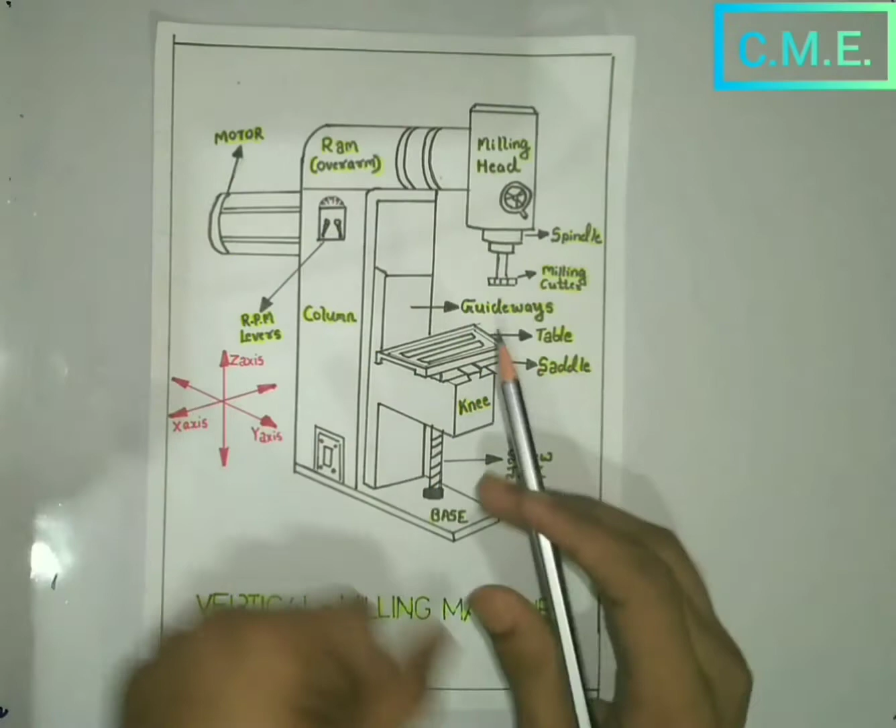In this video, I am going to describe a vertical milling machine along with its parts, and also compare it with a horizontal milling one. In my previous lecture, I already described a horizontal milling machine and its parts, so you can refer there.

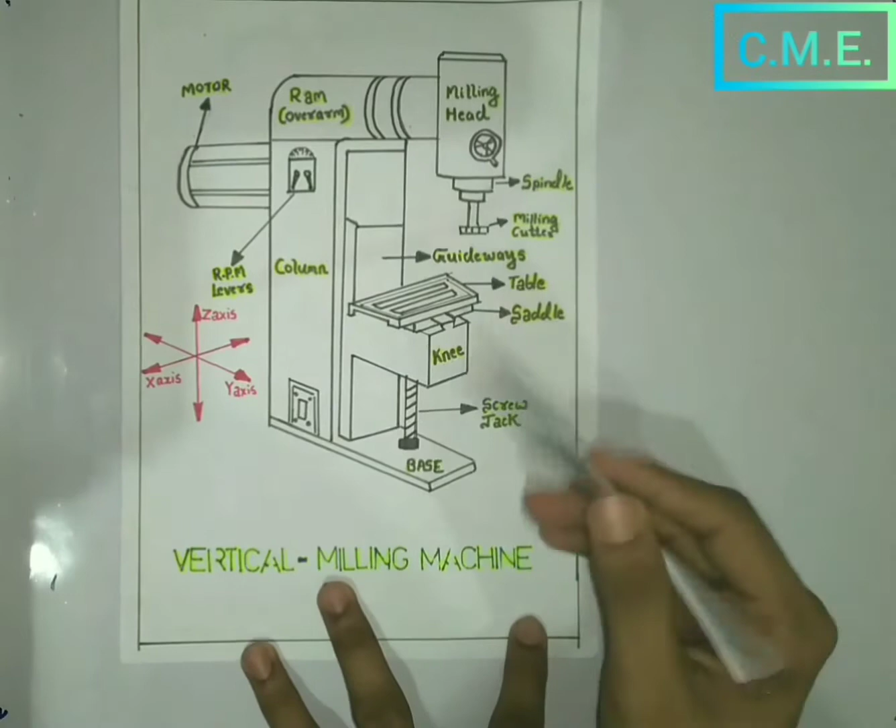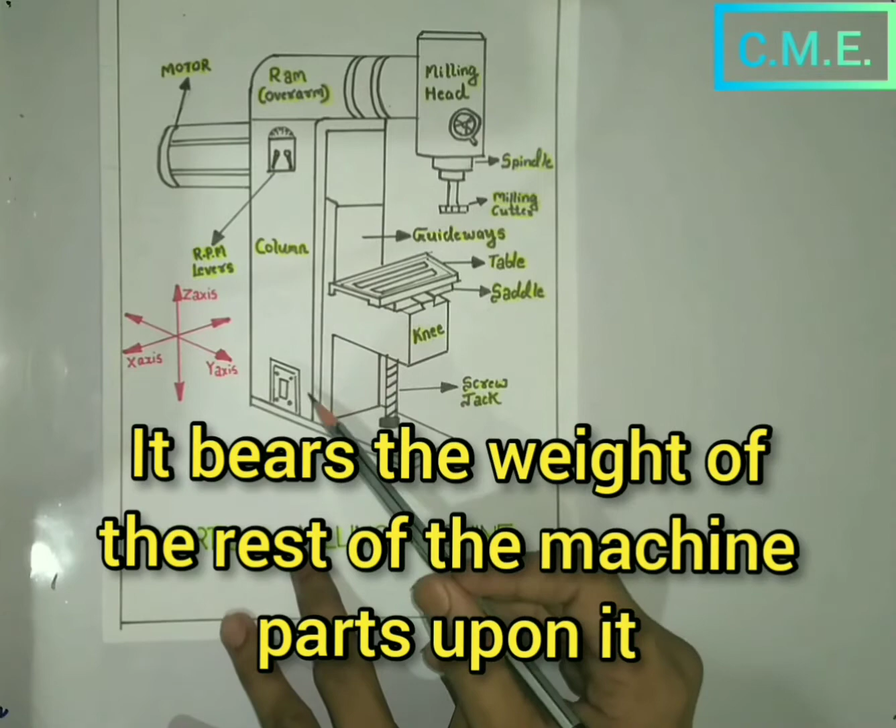So let's begin. This is a diagram of a vertical milling machine, and let's start with the base. This portion is called the base, and it bears the weight of the rest of the machine parts like the knee, the column, the ram, and the milling head. All of their weight is upon this base. This base is firmly mounted to the shop floor, and it contains the coolant reservoir.

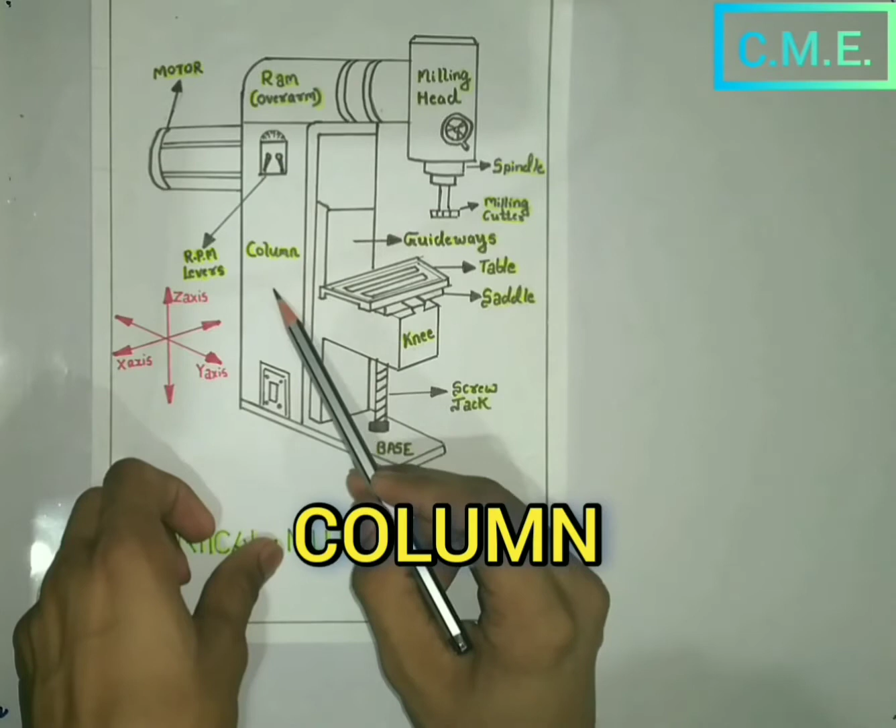After this base comes the column. This column contains the clutches, the shafts, the gear mechanisms, the pulley mechanisms, the electrical components, and everything needed for the rotation of the spindle and ultimately the milling cutter.

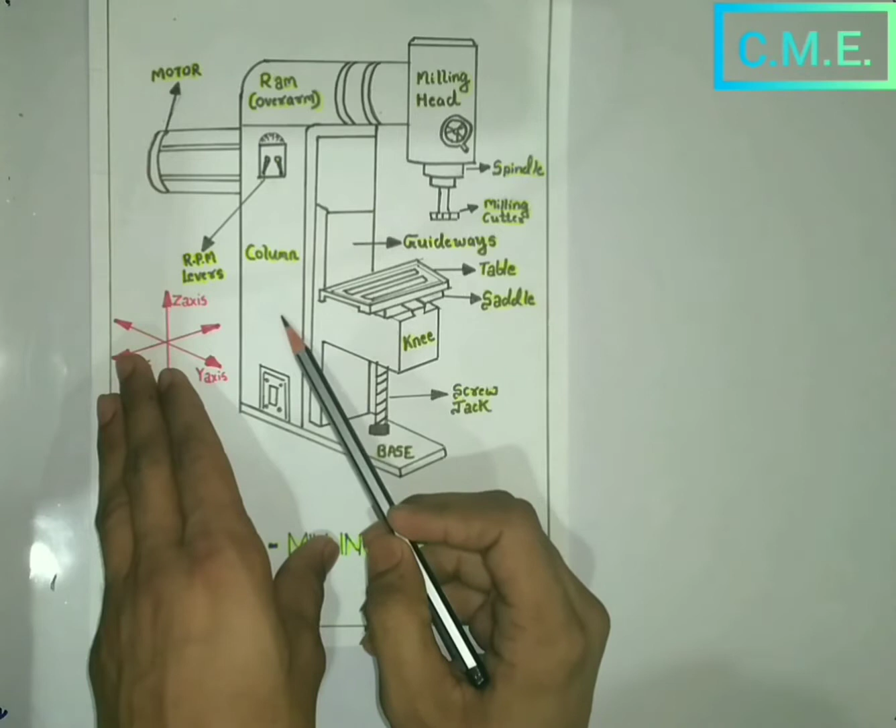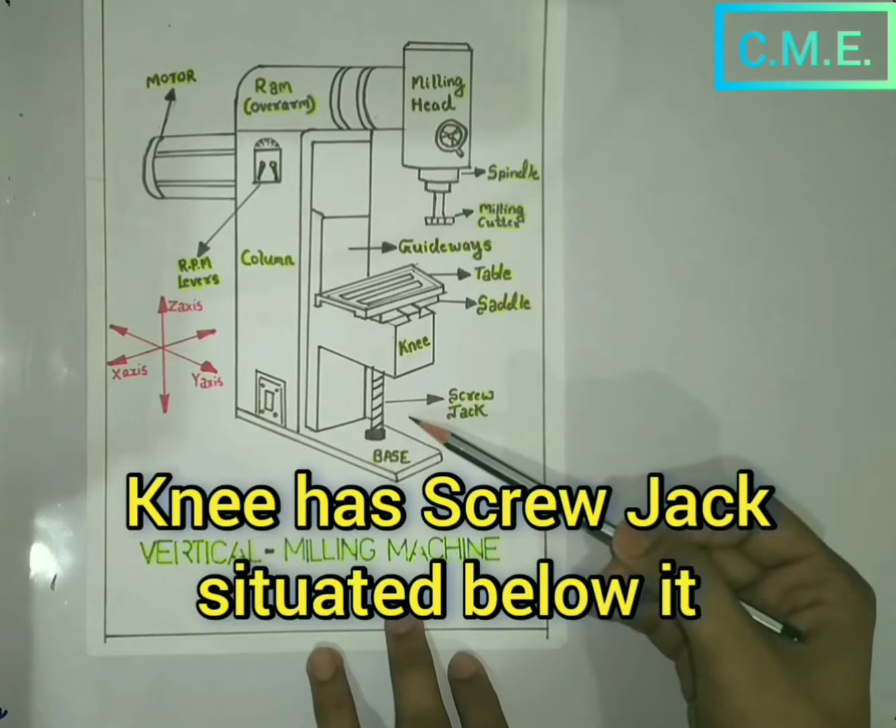In front of this column is the knee. This knee is mounted upon the vertical guideways of the column, and below this knee is present the screw jack. Because of these two factors, the vertical guideways and the screw jack, this knee is able to have its vertical motion, up and down along the z-axis.

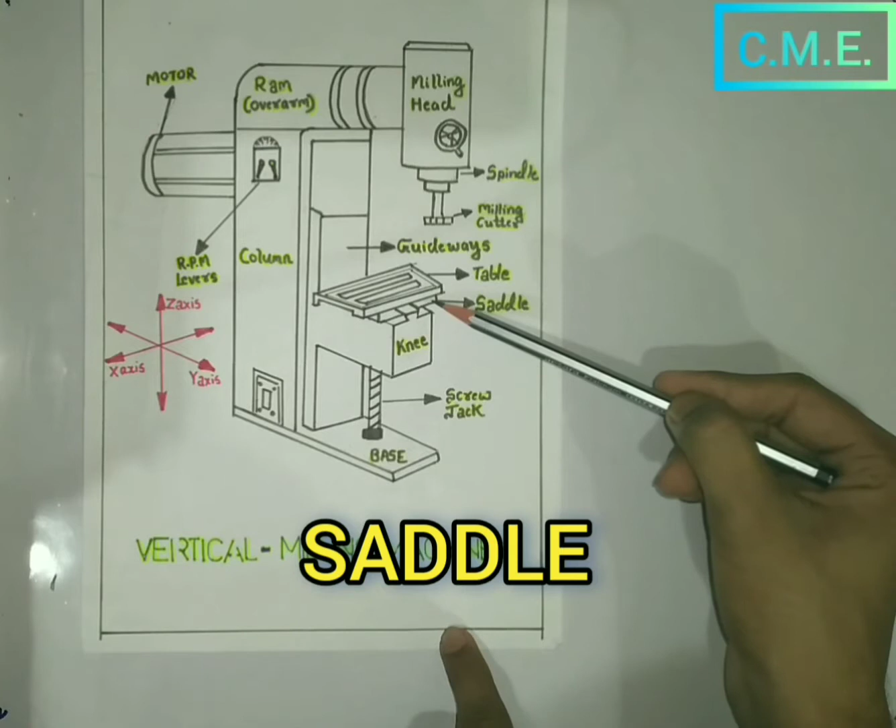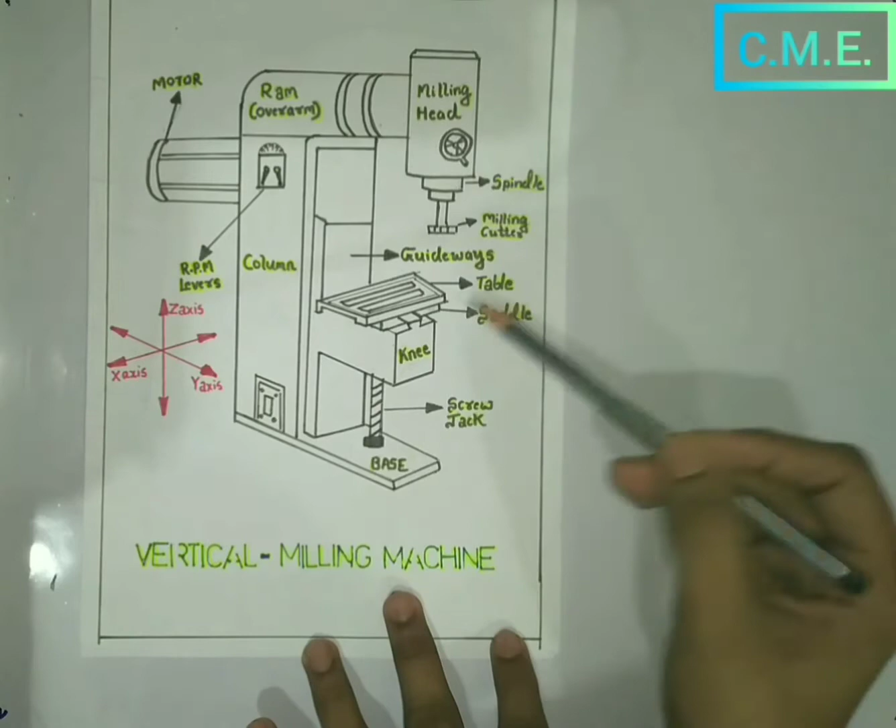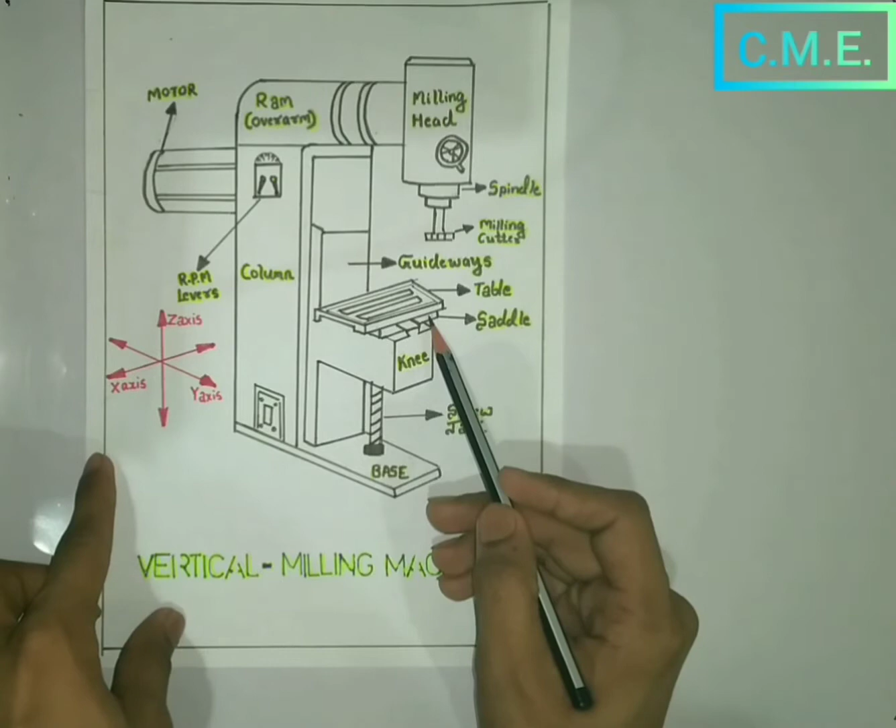Upon this knee is present the saddle. This saddle is mounted upon the horizontal guideways of the knee. At the interface of the saddle and the knee is present another set of guideways - horizontal guideways, similar to how we had vertical guideways between the column and the knee. Because of these guideways and the presence of a lead screw mechanism, this saddle is able to have its y-axis motion, also called crosswise or transverse motion, that is to and away from the column.

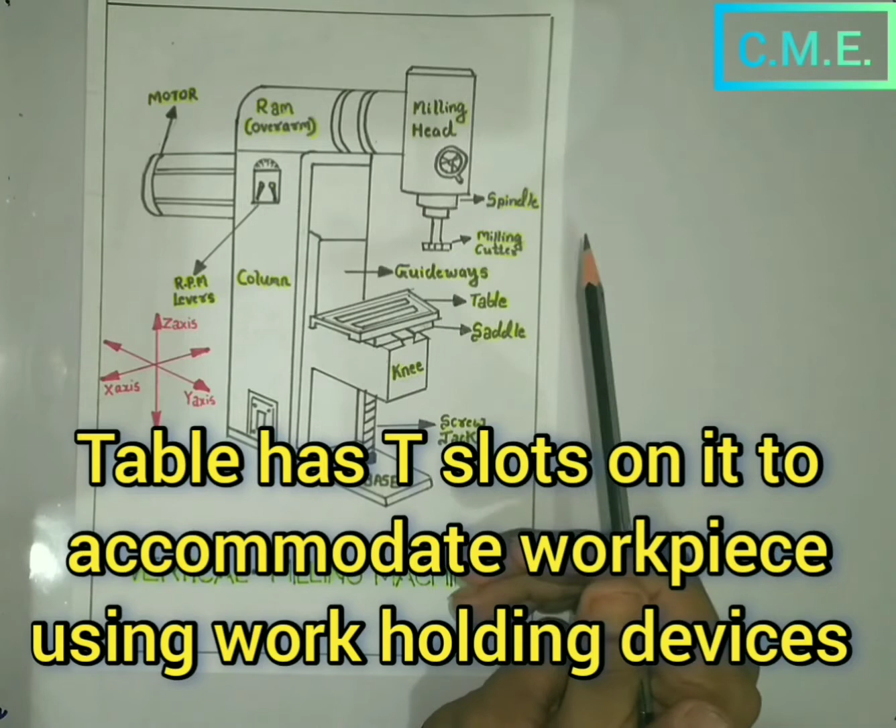Upon this saddle is mounted the table. This table has its T-slots, which are provided so that we can accommodate the workpiece using any work holding devices like step blocks, bench vise, rotary table, or anything suited to our requirement.

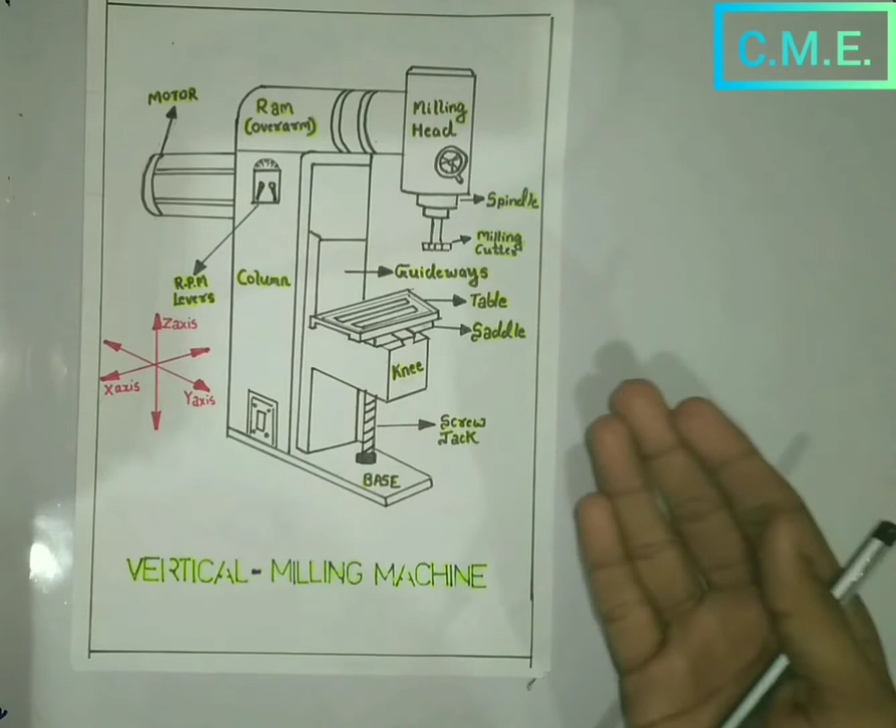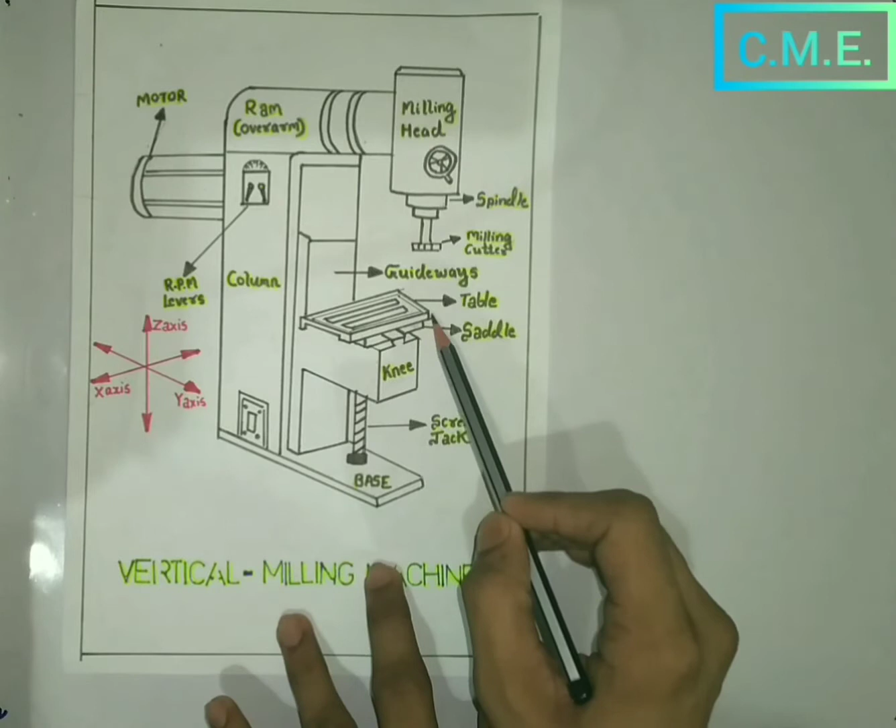So upon this table we have the workpiece via any work holding device, and between this table and the saddle too, there are guideways. This table is able to have its longitudinal motion along the x-axis direction, and when this table has its longitudinal motion, the workpiece above it too has its longitudinal motion.

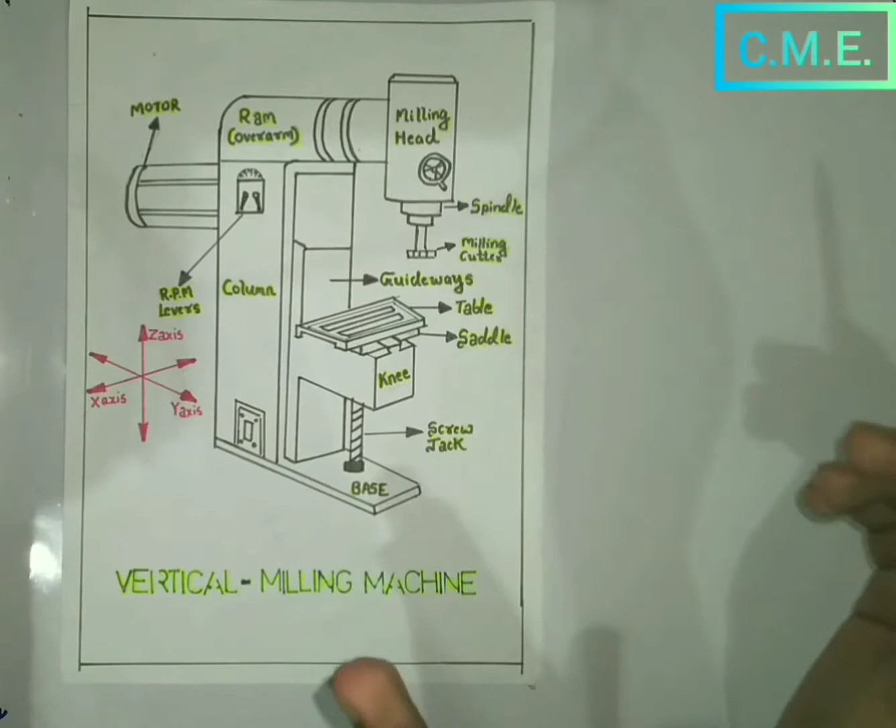Similarly, for the saddle and the knee, when the knee is having its vertical motion, it ultimately provides that same motion to the workpiece, and same in the case of the saddle - when it has its y-axis direction motion, it provides that motion to the workpiece. So we can adjust this workpiece accordingly in these directions via these mechanisms.

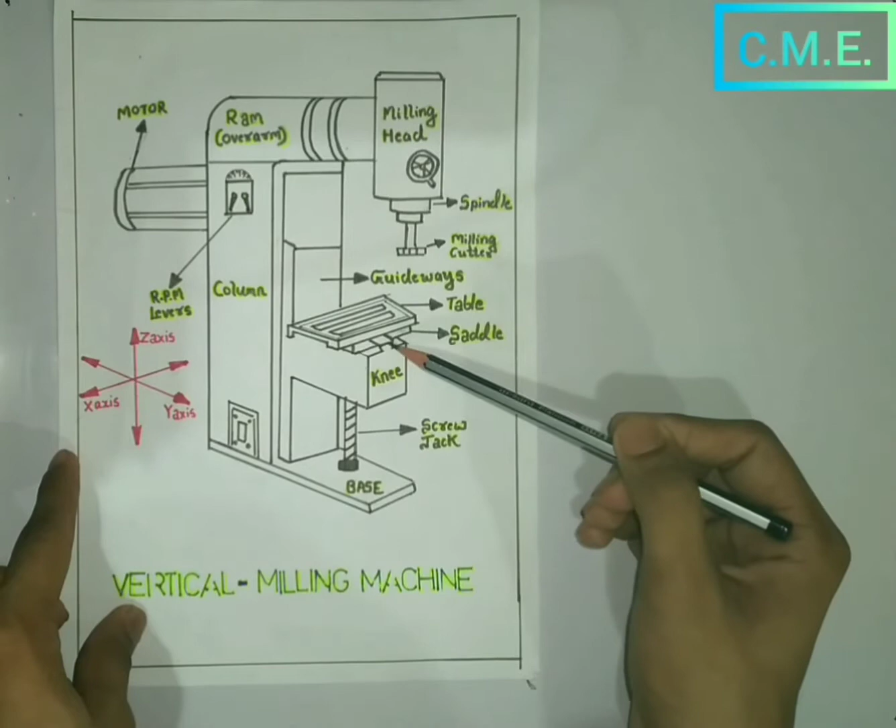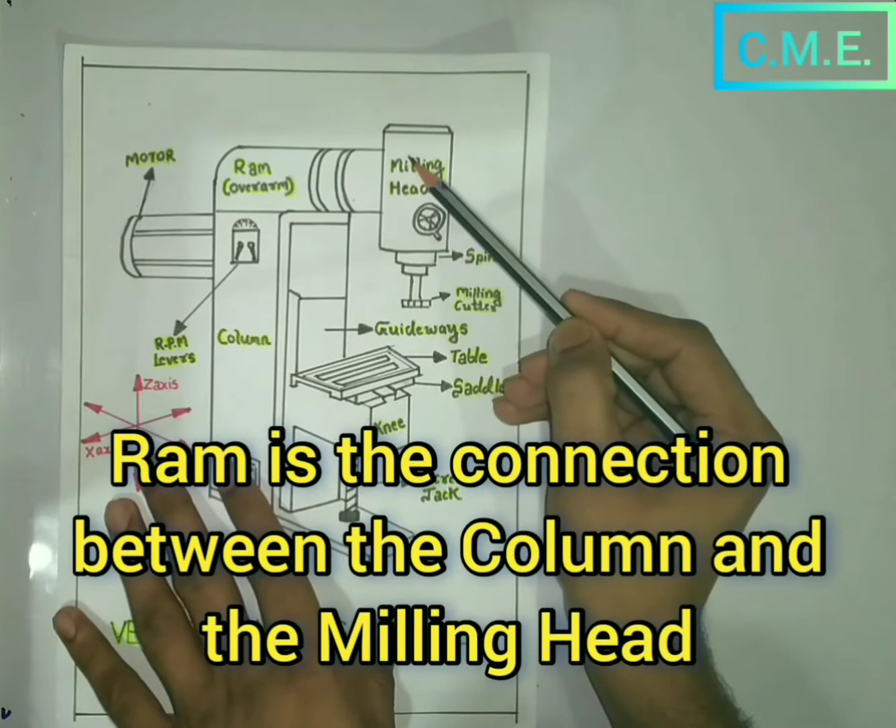Then comes the ram, another name for overhanging arm. In case of horizontal milling machine, we call it overhanging arm, and in case of vertical milling, we name it as ram. This ram is nothing but the connection between the column and the milling head. One end of this ram is above the column and the other end is attached to the milling head.

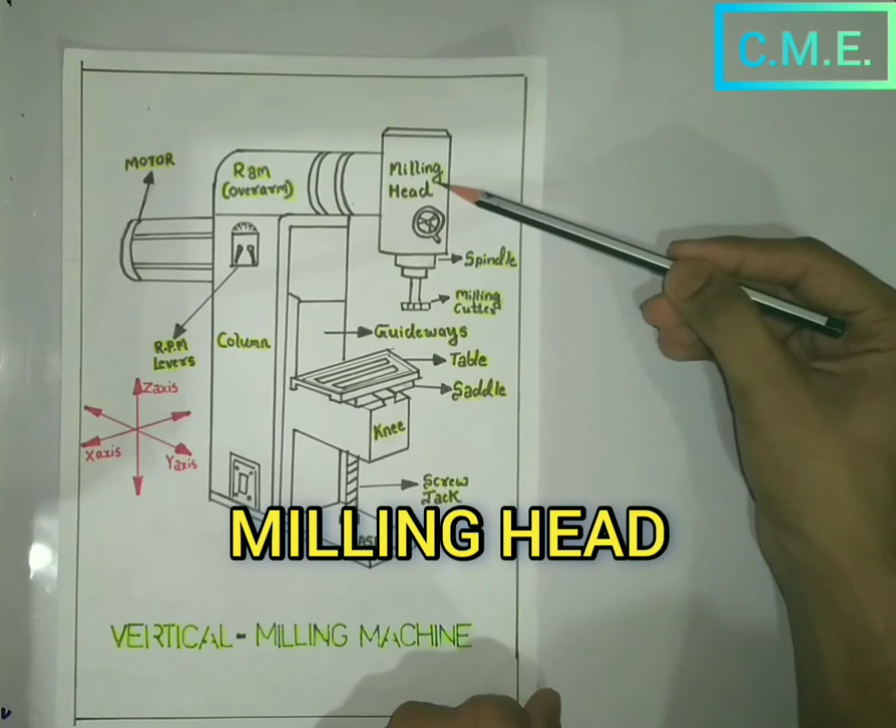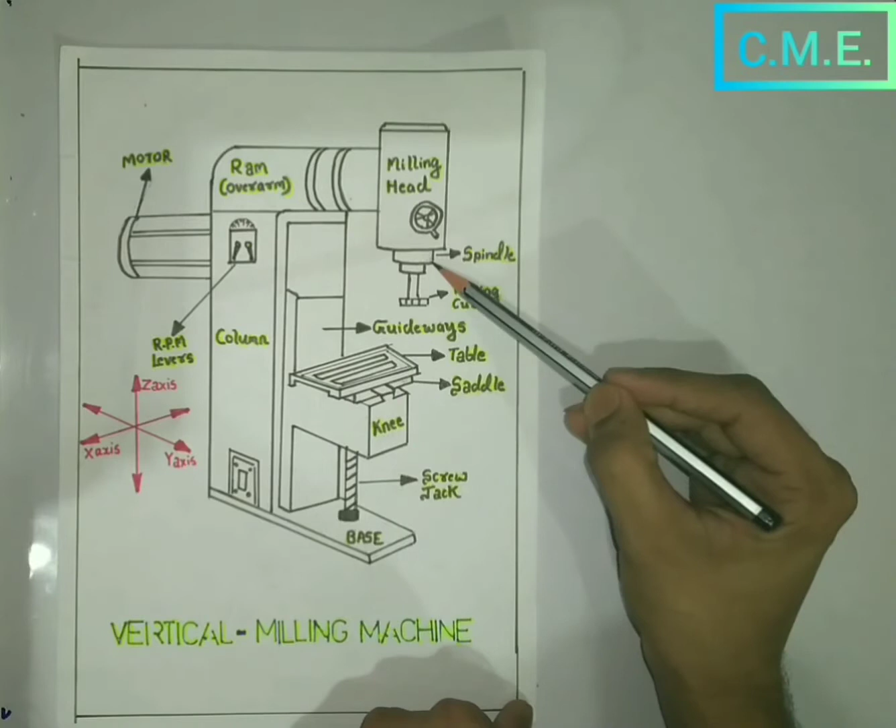This one is the milling head. The milling head contains the gears and mechanisms required for the rotation of the spindle and thus the milling cutter. This one is the spindle. A spindle in any machine tool is anything that holds our tool for rotation, like in a lathe we also have a spindle. So when this spindle rotates, it provides that same rotation to the milling cutter, which is attached to this spindle.

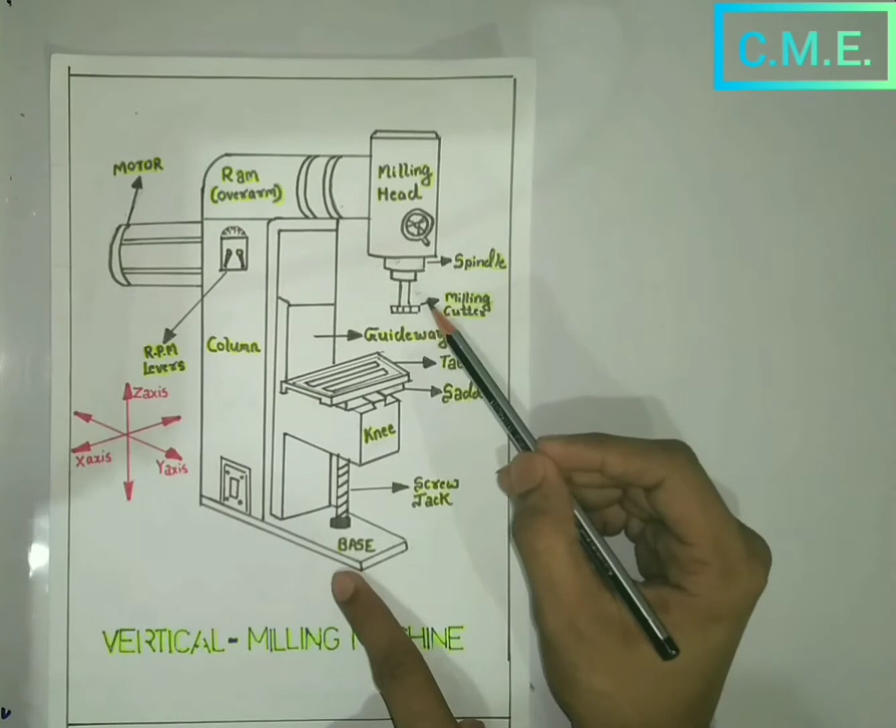And this is the lever. This lever is used for adjusting the spindle up and down, so the milling cutter can be adjusted accordingly vertically with respect to the workpiece.

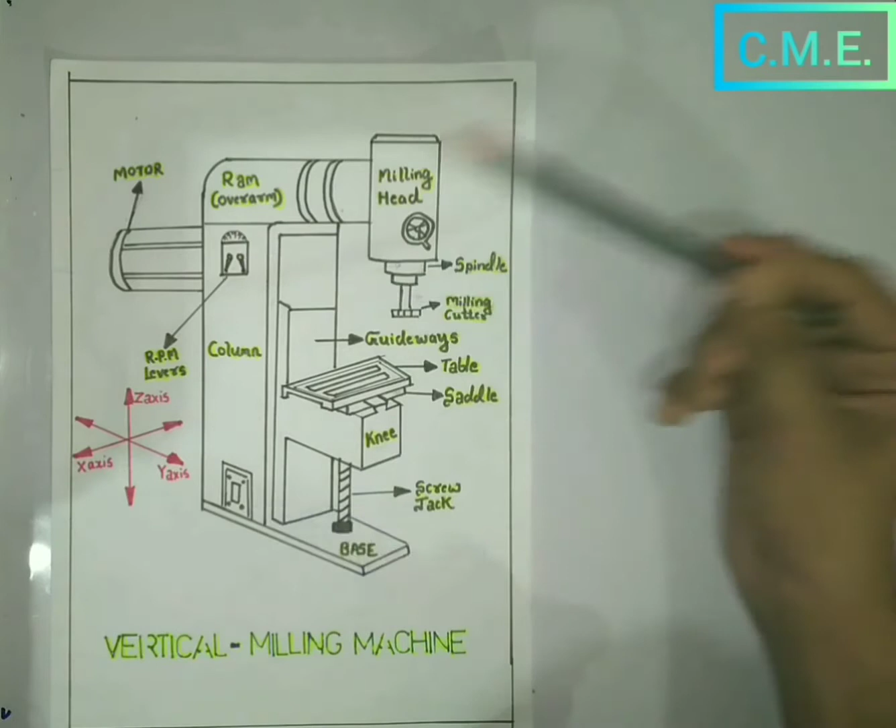These ones are the RPM levers. These levers are there to adjust the RPM of this rotating spindle.

So basically I have described all those basic parts of a vertical milling machine. Now let us compare it with a horizontal one, the similarities and the differences between them.

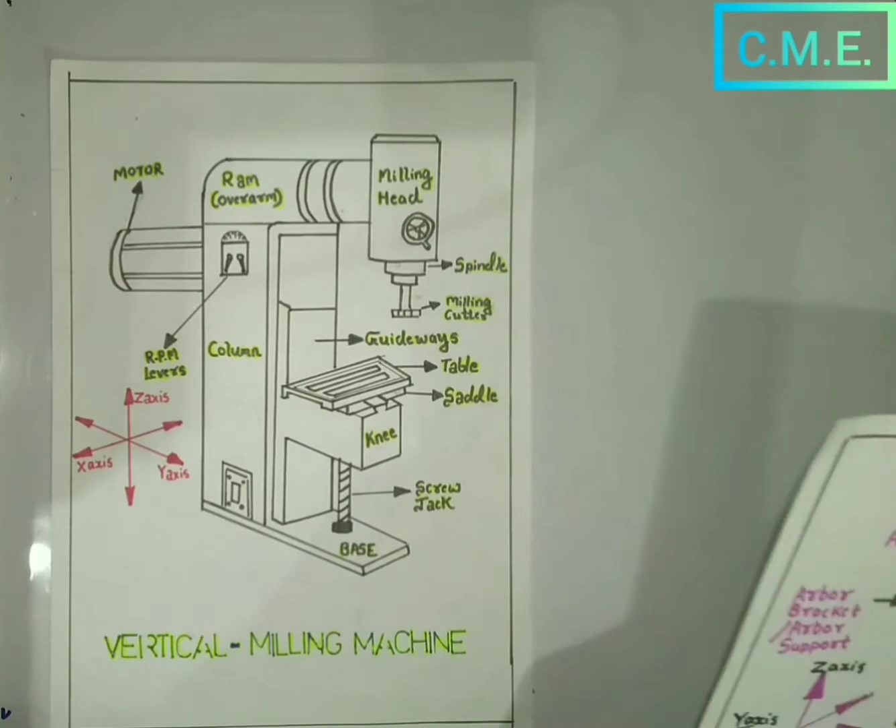Both this vertical milling machine and horizontal milling machine come under the category of column and knee type milling machine. We can guess this because of the presence of the column and a knee.

Both the horizontal and vertical milling machine have basically the same parts like the base, saddle, knee, column, table, guideways. The overhanging arm is known as a ram in this case.

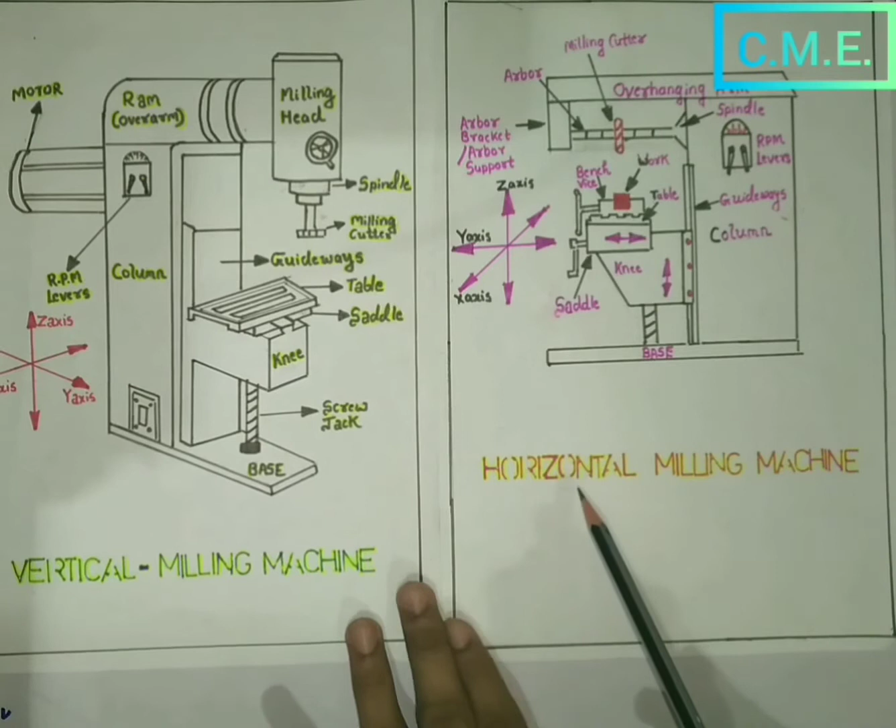But in a horizontal milling machine, we have the arbor and the arbor brackets. Arbors are extensions of the spindle, and in case of a vertical milling machine we don't have that. We have a milling head instead.

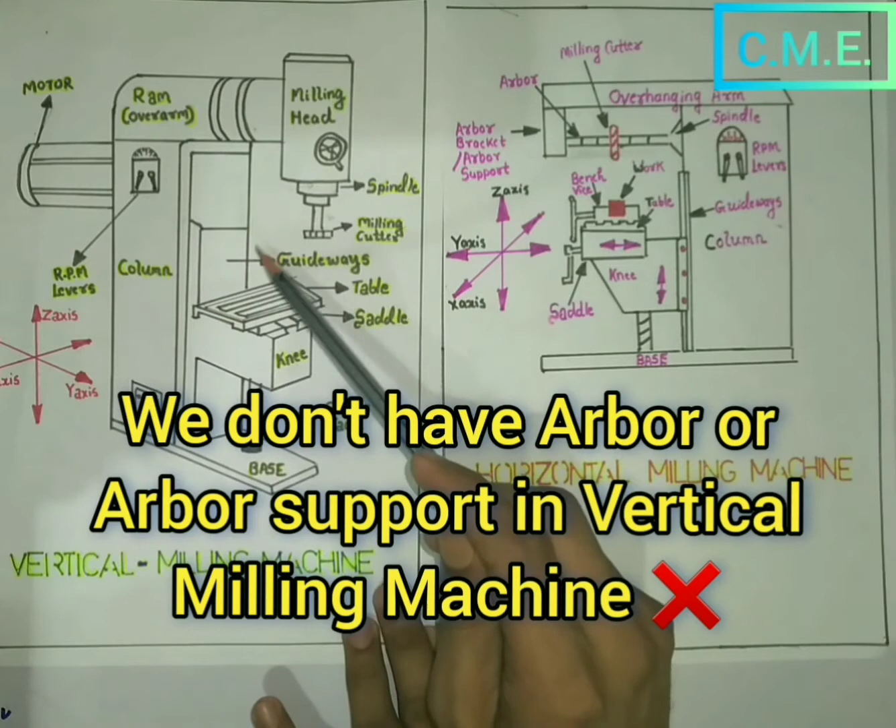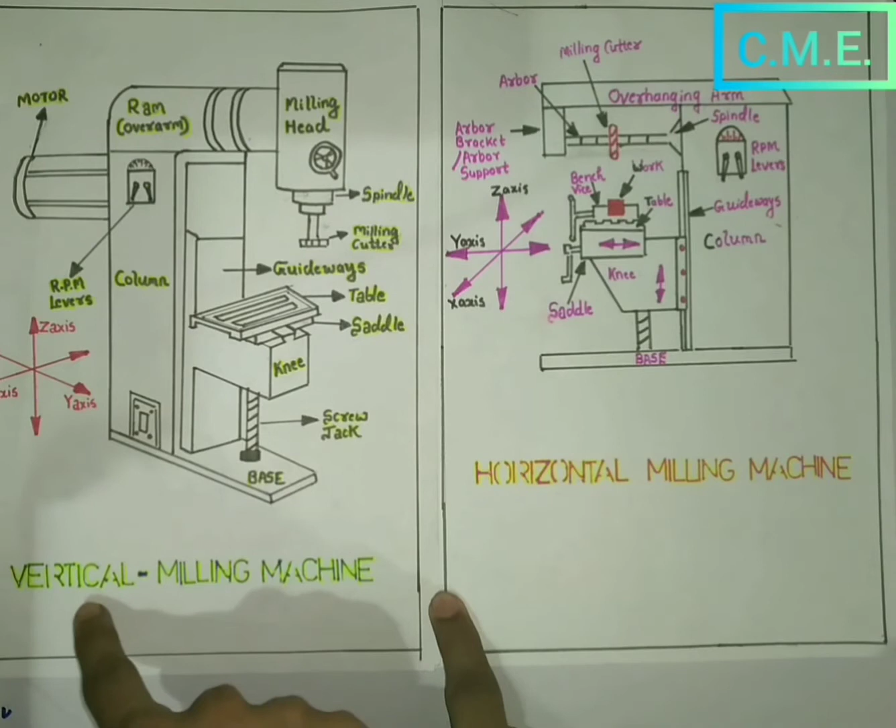The basic difference, and why the terms horizontal and vertical have been introduced, is as follows. In case of a horizontal milling machine, let us suppose this is the workpiece.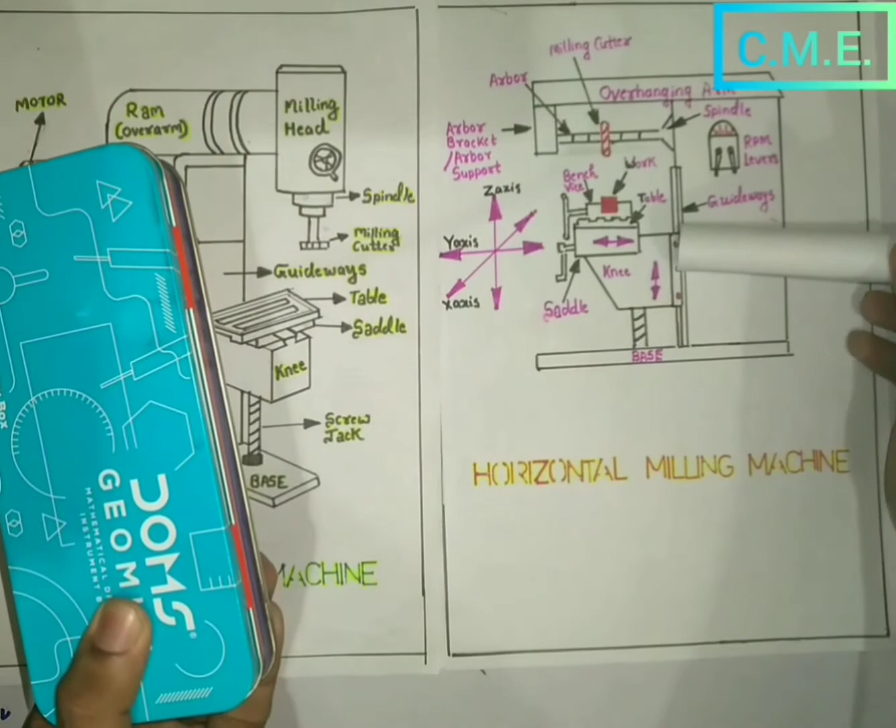This is the milling cutter and this is the spindle. In case of a horizontal milling machine, the milling cutter and the spindle are horizontally placed as compared to the shop floor or the table, and when it rotates, the machining happens in this way.

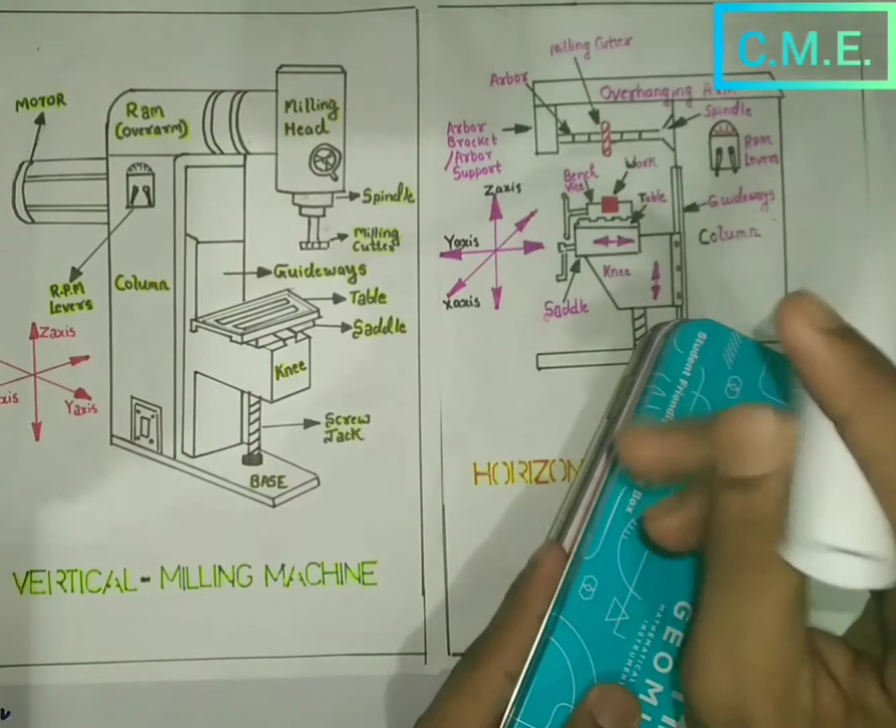In case of a vertical milling machine, the spindle and the milling cutter are perpendicular, or vertically placed, to the shop floor and the table. That is, in this way. So this is how the machining happens in a vertical milling machine.

This is the basic difference between them. That's why the names horizontal and vertical have been assigned to both of them respectively.

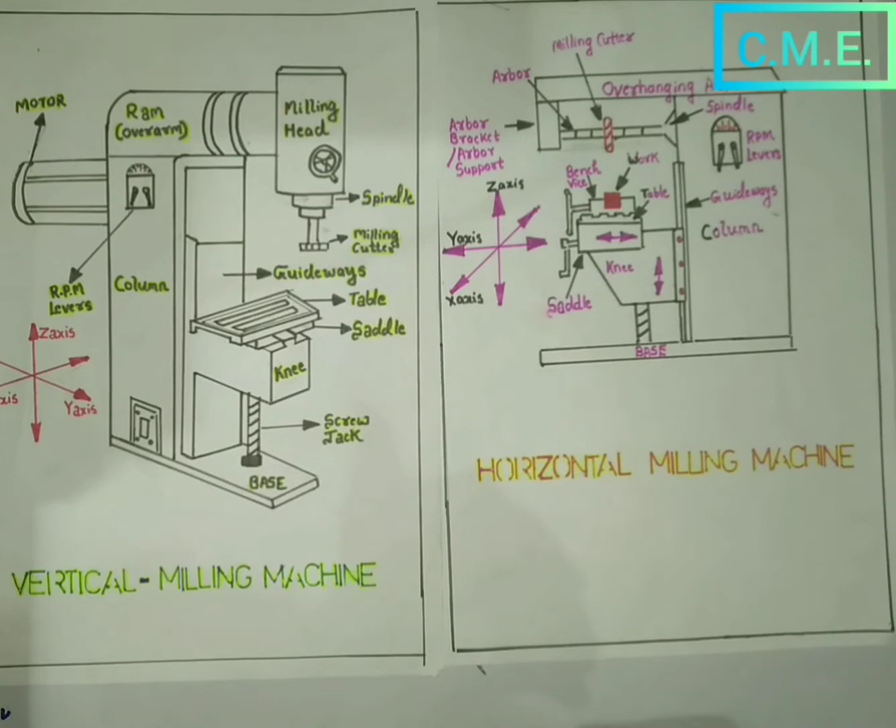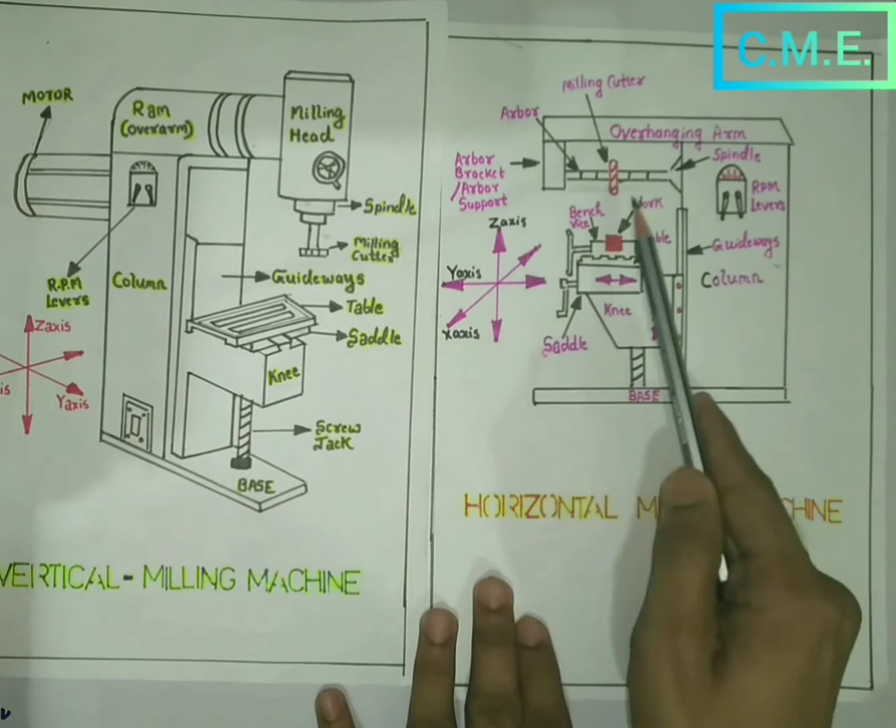In case of a horizontal milling machine, because of the arbor, which is not necessarily always there, when we employ the arbor we can adjust the milling cutter in the horizontal direction with respect to the workpiece as per our convenience, whereas this isn't there in the vertical milling machine.

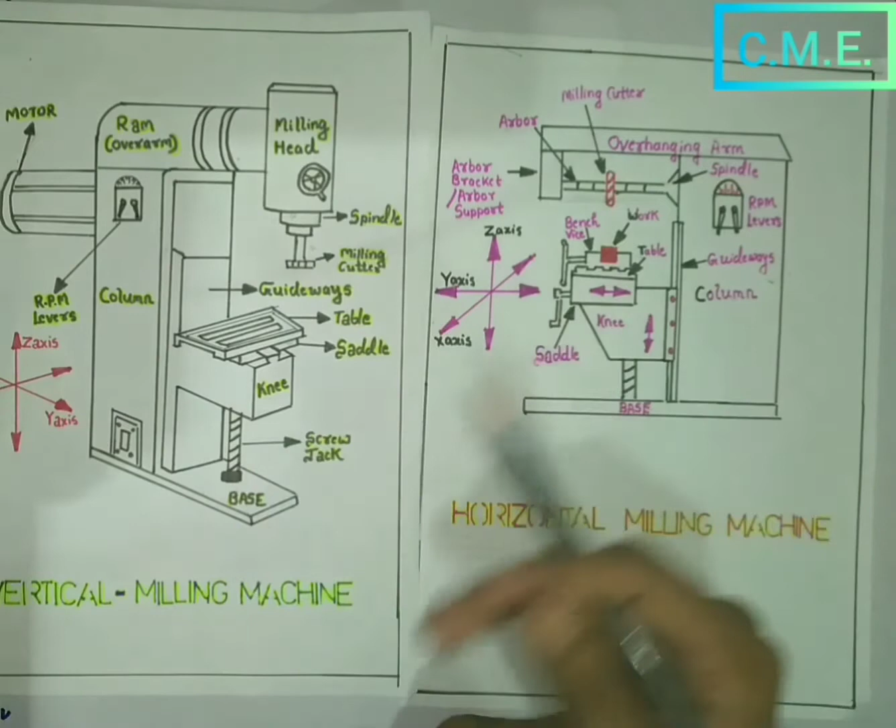In vertical milling machine, in most of the vertical milling machines, the spindle can be adjusted up and down. So this adjusting of the spindle up and down is a special feature of the vertical milling machine, which isn't there in the horizontal one.

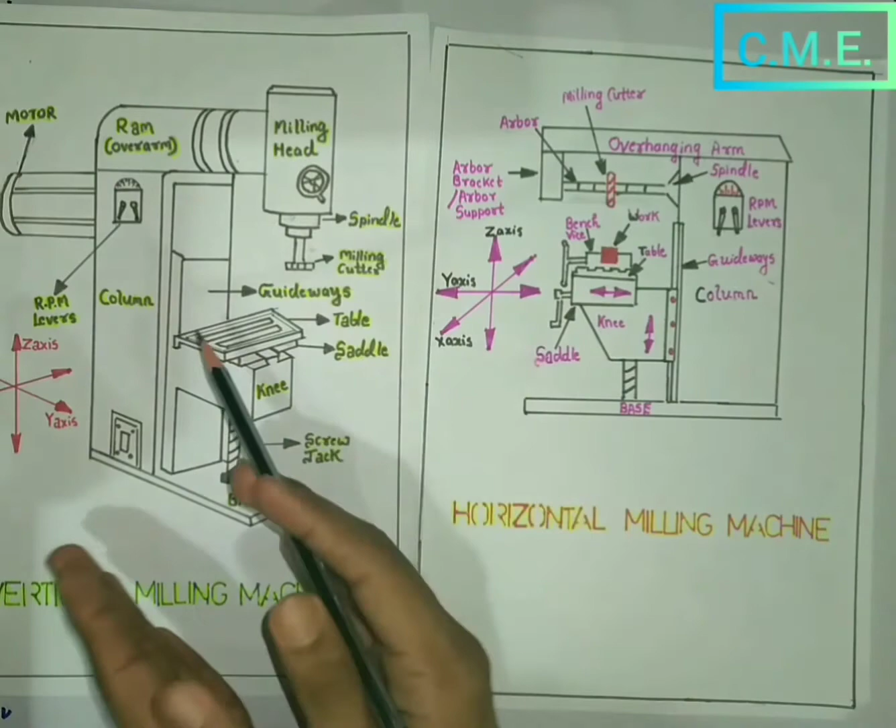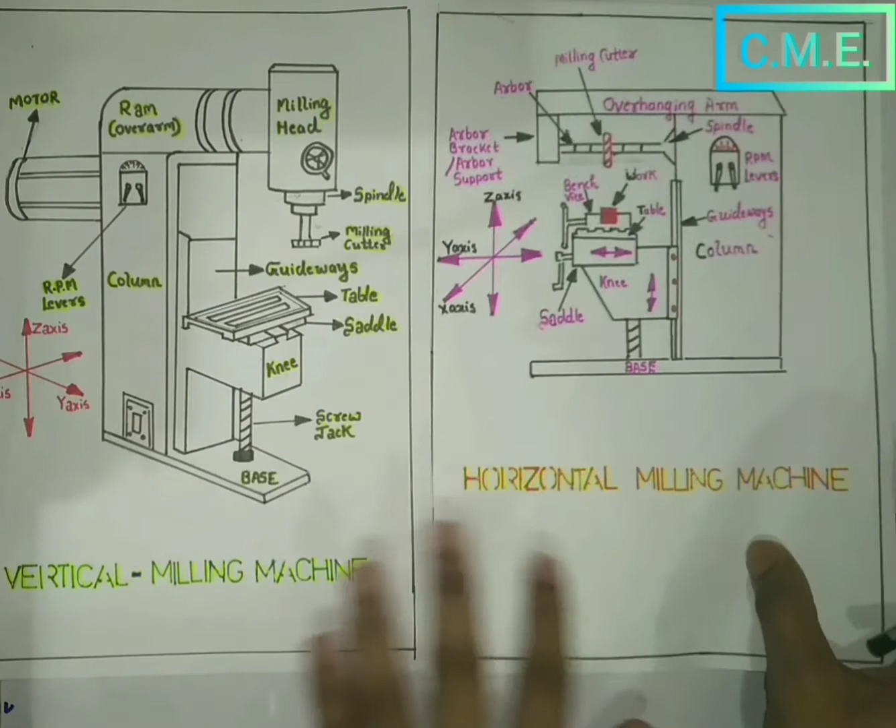Most of the parts like column, knee, base, milling head, ram, and overhanging arm are made up of grey cast iron in both of them, because of three basic properties of cast iron. It has very good compressive strength and very good vibration damping capacity.

During machining processes, vibrations get generated when the cutter gets in contact with the workpiece. In order to damp that, vibration damping capacity is necessary, and this grey cast iron has very good vibration damping capacity. Also, this grey cast iron has self-lubricating property.

So when chips are formed and splashes of coolant get on the parts, they get wiped off very easily.

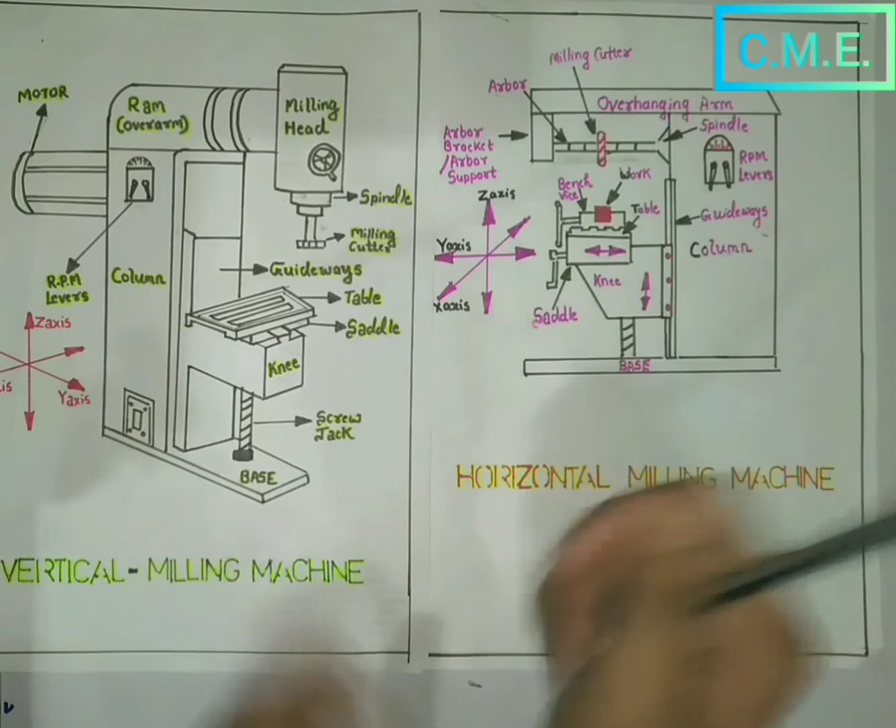In case of a horizontal milling machine, the common operations that can be performed are plane milling, gear cutting, form milling, straddle milling, gang milling, and many others.

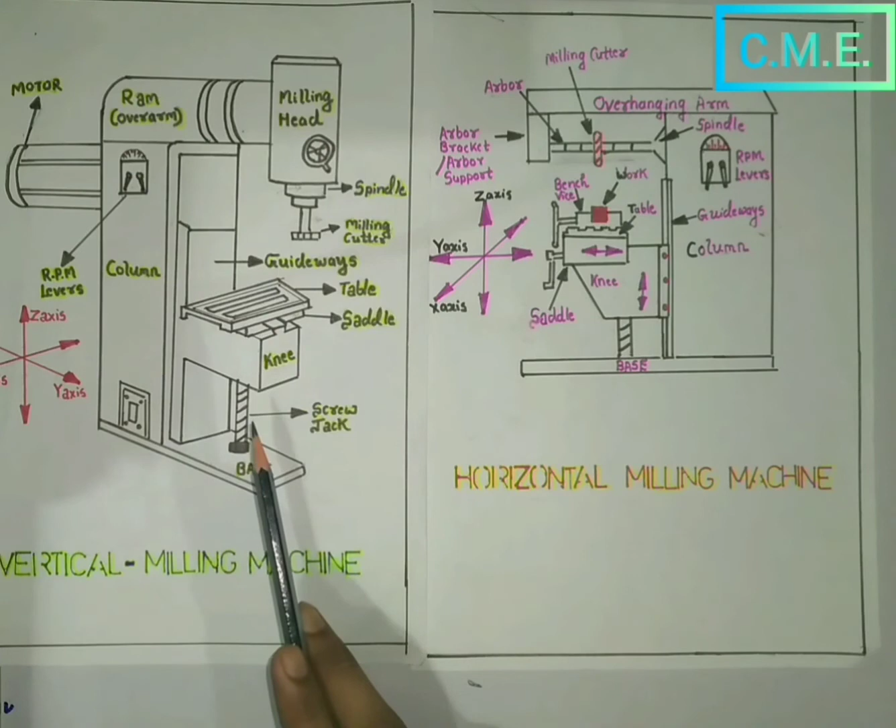In case of a vertical milling machine, the operations that can be commonly performed are slot milling, T-slot milling, angular milling, flat milling, and others. So I hope you benefit from this video.